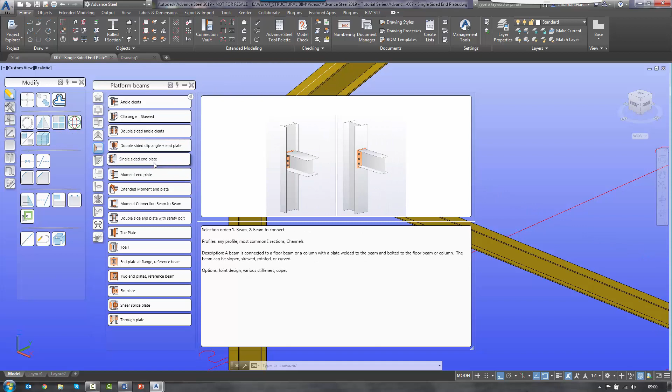So I've made this a favorite, it's on my favorites tab. So I'm going to select my single-sided end plate. So it's first of all asking to select the main beam, so this will be the column. Then I right click, then select the tie beam, and it will launch with this configuration. So like most connections, we have properties, libraries and joint design.

And if we start looking at this connection, this connection will do a single-sided end plate, but it will also notch the beams together. So if this is coming in to meet the web, you will see by the screen it will notch the beam. In this instance I'm coming flush into the web of the column, so there's no need for a notch. I will come to the notch once I put a connection between my tie beam and my rafter. So let's look at this end plate first of all.

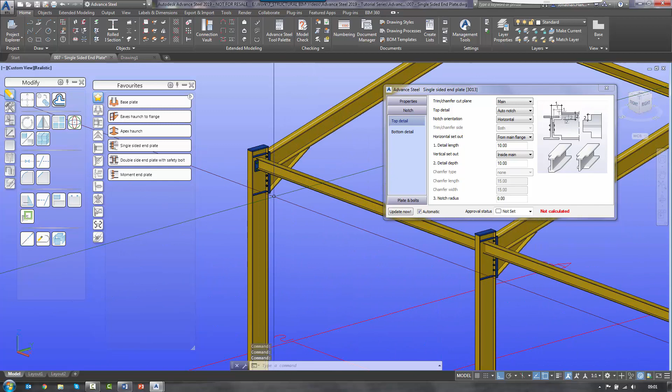So first of all, I go to plates and bolts. I can specify the plate thickness, I can specify an erection tolerance, which will shift it out. And if we look at the bolts and holes, what I'm going to do first of all is set my diameter, and I'm going to keep it with an XOX bolt. The grade and assembly are standard. I have a little button to invert the bolts if I wish, and also the ability to slot the holes in both the plate and the column.

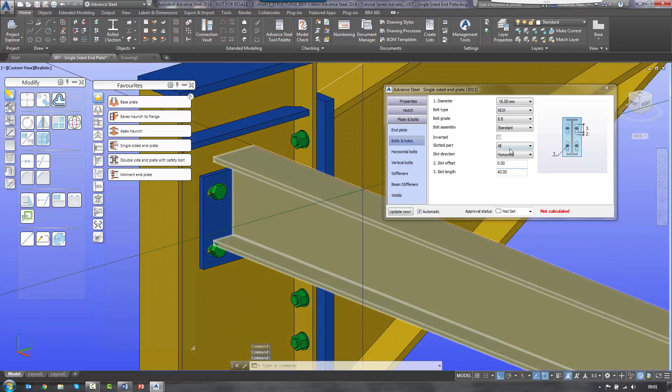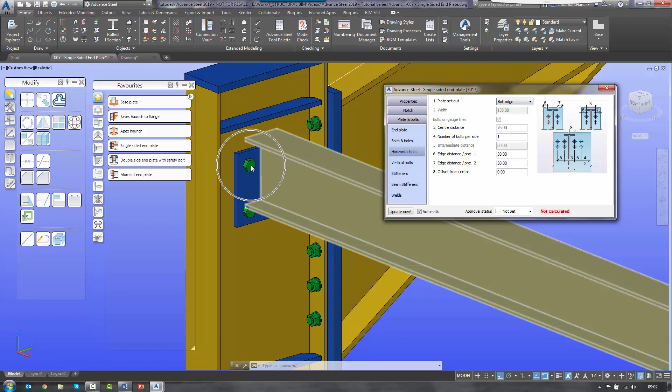Again, I'm just going to set that to none because I want to concentrate on getting the size and position of the end plate. So the size and position of the end plate is controlled by the bolt positions. So when we look at the horizontal bolts, plate set out is the first thing we should look at. Currently it's setting it out based upon the bolt edge. What that means is as the bolt moves, this will control the end of the plate.

So this will take the projection of the tie beam, and then I can set the values either side. So I want that flush to be both sides. So I want this plate to be the same width as the tie beam, and that will give me 88.7. Or if I want, I can just go to total and set it to 100 and a center distance of, let's say, 60. So that gets the position width right.

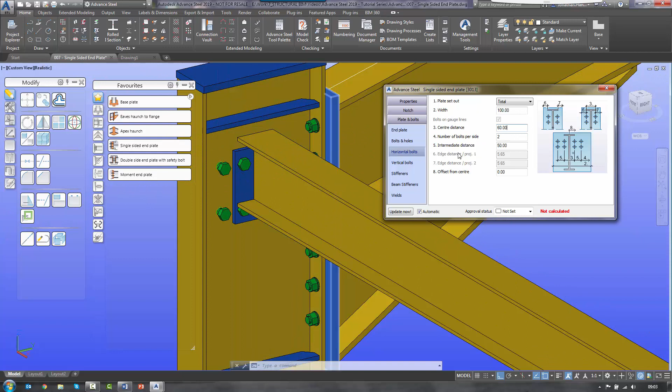So I'm going to go with 60 mil center distance. And the number of bolts per side, if I set it to 2, will double up, but in this instance I just want 2 bolts a side. We then look at the vertical bolts, and again it's the same principles for how we set out the plate. Now currently it's set out by section.

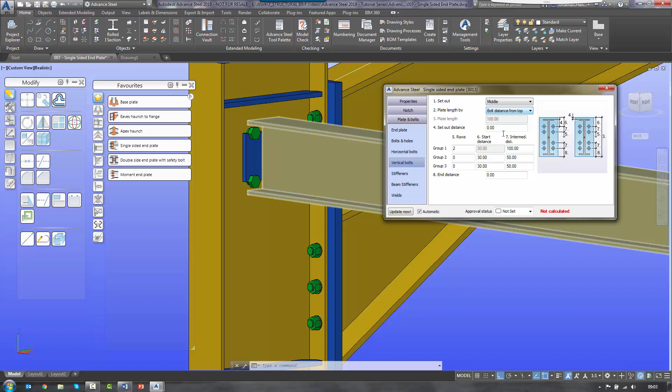We can change that to middle, so it will set it out from the middle, and then you've got these values for set out distances top and bottom. So currently middle distance, and the length is controlled by the distance from the top bolt. So what you can do there is set it out 50 from the top, 50 from the bottom, and there you get your end plate.

And then what you do is you control the distance in between, and as we control the distances of 75, you can see that in the bolt group, 75 between, we've got a 50 mil distance from the center of the bolt to the top of the plate, and the same from the bottom. You can go through these various different options.

So you can go total from the top, and then you set out your distances, and we could say 150, and it will control it that way. But the one I want to work with is bolt distance from the top. Let's say that is going to be 30 and 30, and that will set it out like that. And if we go with the 75 spacing, let's increase this back to 50 and 50. So it's just a matter of going through and setting these options.

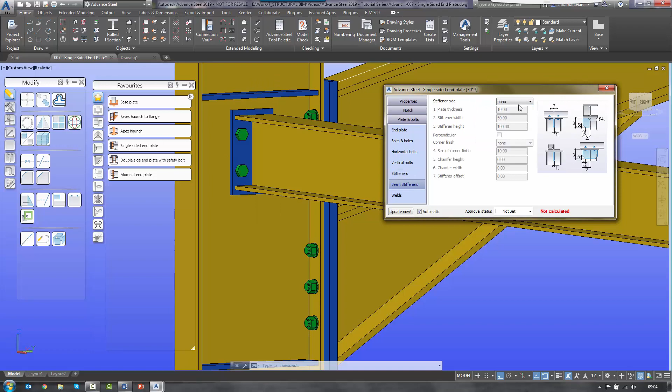So it's just understanding that the bolts are really controlling the size of the plate. We have options for stiffeners, so I could stiffen on the top, bottom, both, but in this instance, just in the position of where I'm at, it's not really going to work, so I'm going to set that to none. And we also have the ability to stiffen the beam, so I can put a stiffener in both sides. Again, I can just right click, advanced joint properties, so in this instance I'm going to put that pretty standard end plate into position.

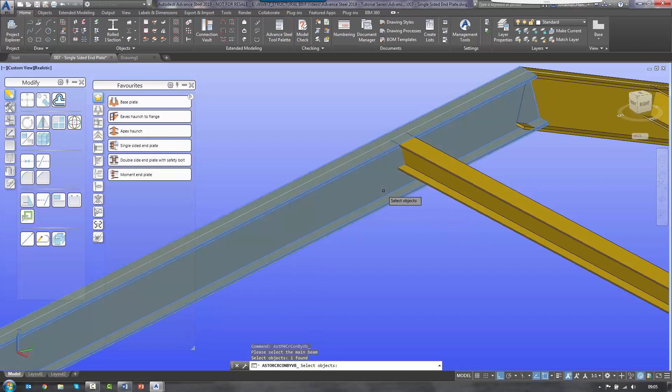Now if we concentrate on this one, where it'll get a little bit more complex, so it's a single sided end plate, select my rafter, right click and select the tie beam. And when we have a look at this, you will see that it's now started to auto notch the tie beam going in, and this is because we have the notch properties. So in the other example there was no notch.

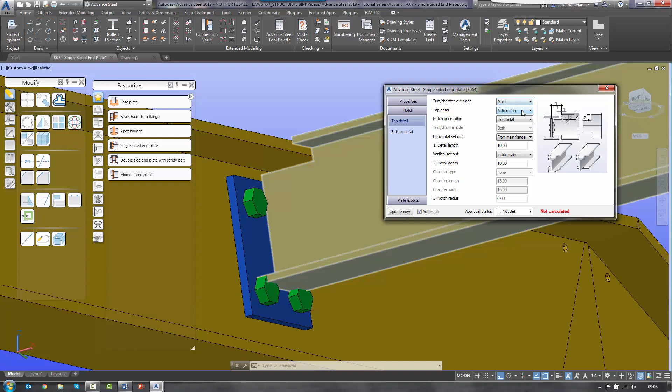In here I can actually control how this notches round the beam, so I can notch the main beam, and I can top detail where I can auto notch it, or I can actually manually start to do it and where the notch is orientating from. So I tend to leave mine on auto notch at all times, and then I just control how it's setting out the object. So if you can see there, it currently says that it's set out from the flange.

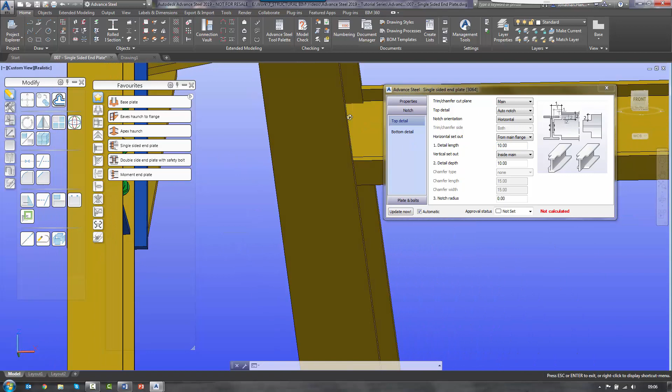And what that means is that when it's set to from flange, this distance just controls the distance between the notch and the flange. So if I set it to 10, that's a good clearance for me, and then you have the same for the notch on the underside. So I'll just orbit this round slightly.

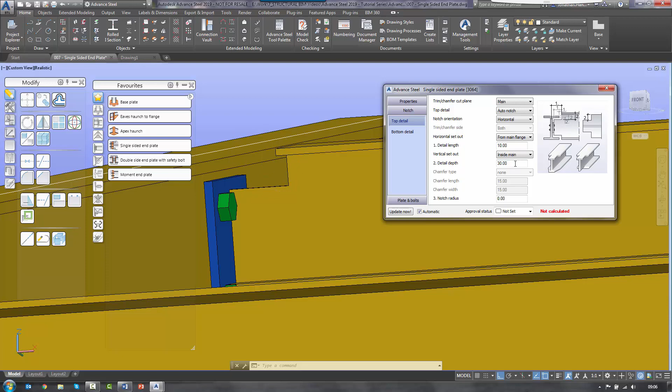So in here we also have it's coming from the inside of the flange. We can go outside and you'll see that the notch will go up, and we could set it down 30 millimeters, or I tend to go inside of the main, which will be the distance on the inside of the flange, and again I set that to 10, and that gets me my notch detail.

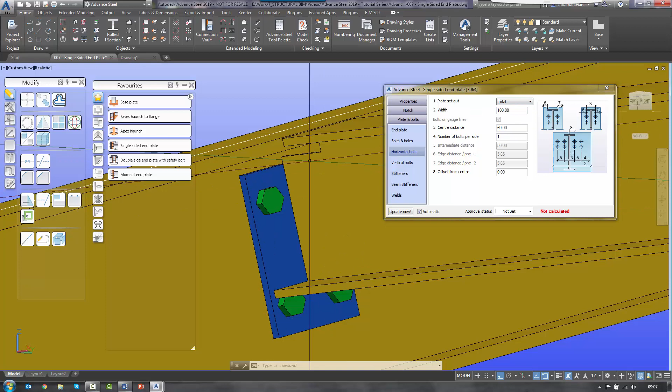So once we get to the notch, it's then the same principle where we set the distance for the holes, and then we look at the horizontal bolts. You can see it's coming from the bolt edge. I'm going to set the distance to 60, 0 projection, 0 projection. If you wanted that to be a total, we would just go 100. So it's a 100 wide plate, 60 mil between the bolt centers.

We then look at the vertical bolts, and we can actually go plate from sec, and it's the total distance from the top, and you'll see that's got a set out distance of minus 30. If that was set to 0, the plate would be flush with the top. So if I just go, let's say minus 30 or minus 24, you'll see that I can start moving the plate up and down.

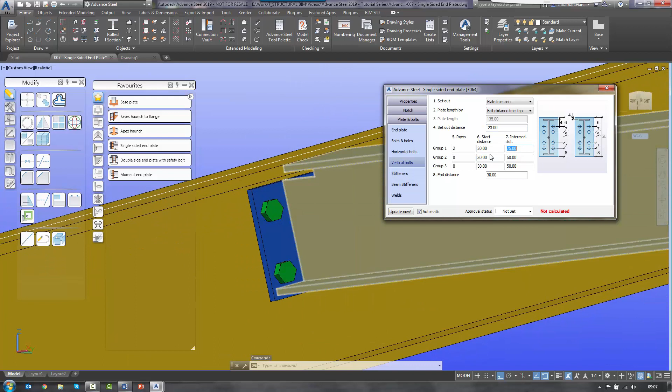So if we go with something like that, where it's say minus 23, we then control the distance between the bolts. So let's say the distance was 60 millimeters and we had a 50 mil at the top, and that gives you a plate length then of 140. So let's have a look. We've got bolts added, end there to there, and we are good to go.

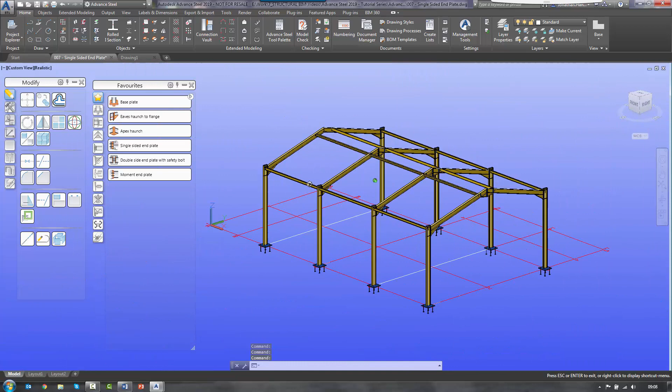So join me again soon where I will look at copying the joints across this building model.